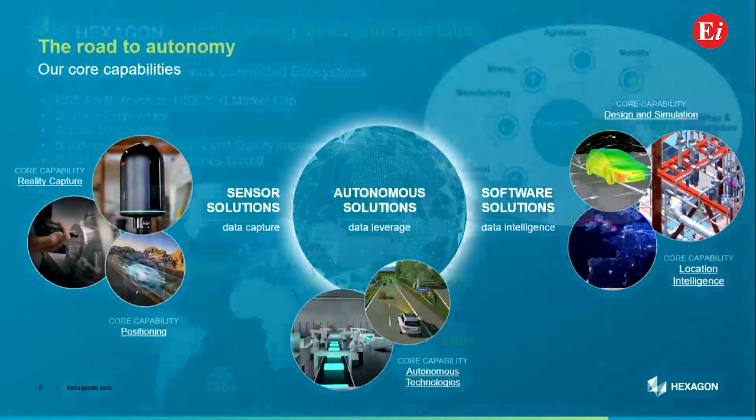And what is our key strength? The core area is autonomy. We are a company continuously working towards autonomy, through three core competence areas. One is sensor technology - this is our core area, the ability to capture data and the ability to integrate sensors into all possible equipment. And reality capture.

So we have our own cameras, our own 3D scanners, our own equipment, CT scanning systems to have reality capture, and we are also capable of positioning, that is geosystems and georeferencing. So this is one of our core competencies.

The second important competence is autonomous solutions. A quick example is we are partnered with Lexus and we manufacture about 40 autonomous cars every month. So autonomy is one of our core competencies.

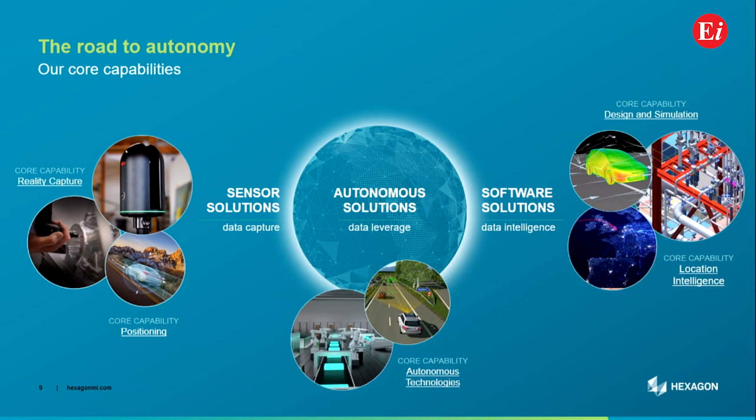And the third most important is digital, what we call software. I'm not happy to put this word software solution because now it's more about digitization. And of course, with the help of software, we do a lot of digitization. So these are the three important core competencies.

And out of this, we are going into smart digital reality. We use our core competencies to typically have digital accessibility, infinite connection, and autonomy. So out of all these, we eventually plan to reach smart digital reality.

A quick understanding of where we are positioned. About 95% of the cars produced, 90% of the aircraft produced, and 85% of the smartphones that are produced, there is Hexagon technology everywhere. So all of them are major users of Hexagon technology. And so for us, it is very easy and important to be part of your digital transformation.

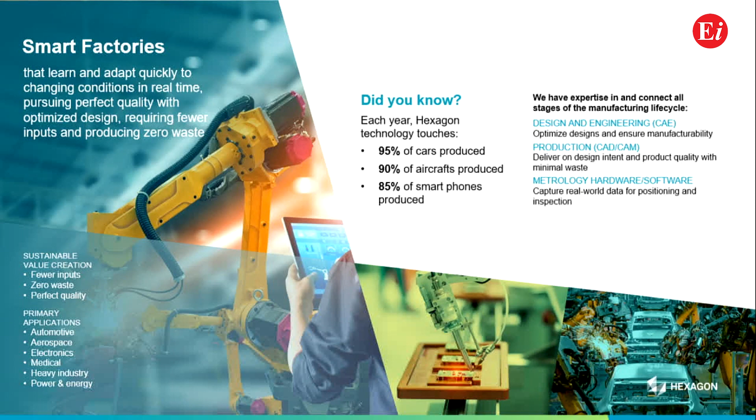So that is one of the core areas that we think of implementing to as many customers as we can touch. Moving ahead, connect and automate process and data islands to drive that particular value. So while we have a number of solutions, our goal is always connected to our capabilities. It's not that we go outside our capabilities to ensure something that is not possible. And one such is, we have all these capabilities.

Let's say, starting from design and engineering, you have factory operation capabilities, manufacturing, quality, and service. So these are all the important areas which are necessary for any electronic end-to-end manufacturing that you can perform.

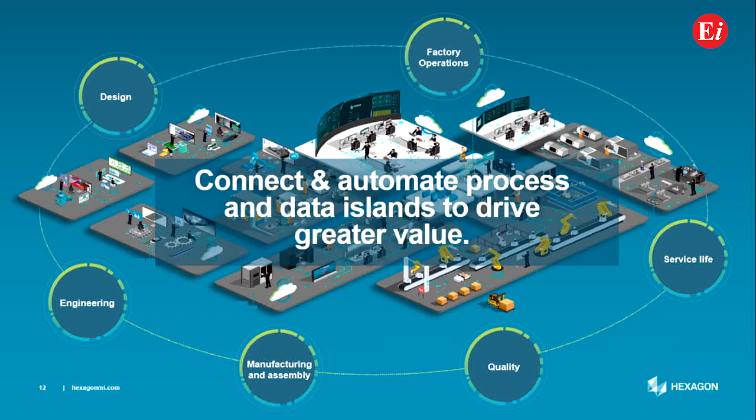And to further help on the smartness in the way you manufacture, what are the entities influencing this entire manufacturing aspect? This is basically digital transformation - your ability to connect your design to the production, your ability to connect production to inspection, your ability to do inspection and then maintain and then a feedback loop. So everything that is, as you design, as you manufacture, as you produce, and as you see the quality back to your CAD model.

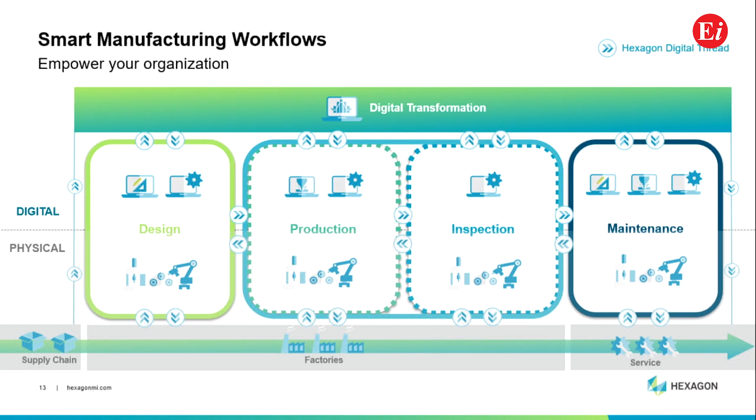So everything has to be connected in this digital environment, and that is what we are trying to provide to most of the people who will use Hexagon. So we have divided this into a digital space and a physical space. If you see here, there's a very fine line. Digital space performs all these activities in a digital or software environment, whereas the physical space uses, let's say, a scanner, a CMM machine, or a quality sensor. So all these digital and physical spaces have to be interconnected, and that is one of the most unique aspects of Hexagon as a smart manufacturing provider.

Now looking at electronics, typically why does an electronic equipment fail? I think this is the most critical aspect that any electronic manufacturer has to look into. So the four major reasons why they fail: the first is temperature. I think everyone agrees - any increase in temperature leads to failure.

Humidity and moisture - we have a lot of customers working on addressing humidity and moisture aspects because all the electronics are now compact. They are completely closed. There is no space for air to move, no space for airflow to happen. So natural convection becomes very low now, and you are fully reliant on evaporation and condensation aspects.

Then vibration and shock, drop testing. If you drop a product, how durable is it? Will it break or not? Our older mobile phones, however much we used to drop and play around with them, never used to break. Now with advancement in technology, we are seeing a lot of issues in this space, purely because there is no way for the force to escape a particular body now. Earlier, you might have seen the mobile phone break into multiple pieces - your battery, front panel, back panel would come out. That is one of the ways the energy is going out of your equipment. But now all your mobile phones are completely sealed, so there is no way energy can go out of your component, and so it breaks your screen, which is the easiest part from where your energy can come out.

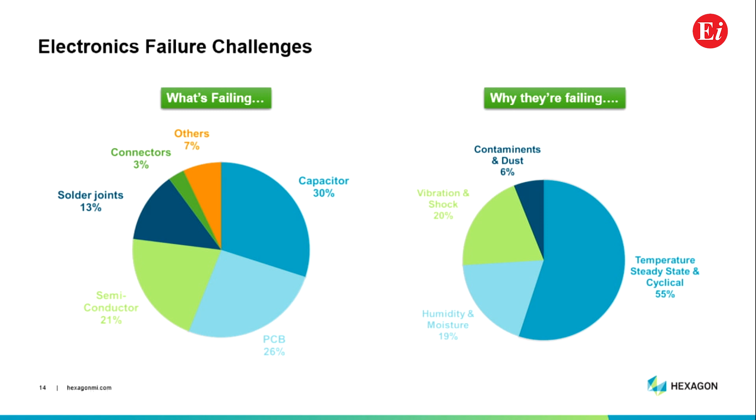Apart from that, what are the products that are typically failing because of these aspects? Let's take a look at that, and then what is important when a new product introduction is happening into the market. Most of us are aware that only 3% of consumer electronic startups make it to the market successfully, and why that is happening is because of product launch issues, product technical issues, manufacturability issues, availability of technology issues, and so on. There's a lot of factors integrated into this inability to launch a particular product, and that is where digital transformation comes into picture.

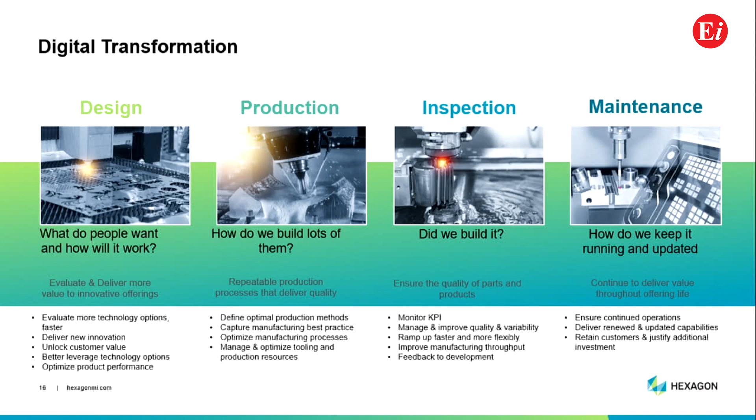So if you want to really launch a product, can you perform digitally a design? Can you produce your product digitally first? Can you see the feasibility of your product in a digital manner? And can you see the maintenance aspect of your product in a digital manner before even going into the launch, or the product development, or the design and prototyping phase?

To help with that, let us see what I mean by a digital thread. Now you are seeing an example of a simple joystick. You can imagine this joystick to be any other electronic equipment. When I'm talking about design and engineering, I'm talking about materials modeling. I think all of us want lightweight materials, we don't want a heavy metal phone or anything of that sort.

So you have to start by designing the right material, then manage your material. Some of the OEMs may manufacture and make their own material, and these will be proprietary materials. Now how do you manage your material? That also has to be maintained digitally. Designing your component, thermal management, and structural integrity. Some of them include motion.

Your electronic components may have a lot of moving equipment. How do you understand the dynamics of your product? Frequency in terms of structural frequency, acoustic frequency, and so on. Fatigue, impact, like your drop testing. Plastic flow, so your molding activities, right? How do you ensure accuracy in molding?

Internal scanning - if I want to understand whether all my parts are integrated well into the equipment, the one thing anybody does is a CT scan. So you put your equipment through a CT scan, but that is a high investment technology. So you need a digital technology to basically understand this structure before even investing in a CT scan machine. So digitally, can you do this particular internal scanning activity?

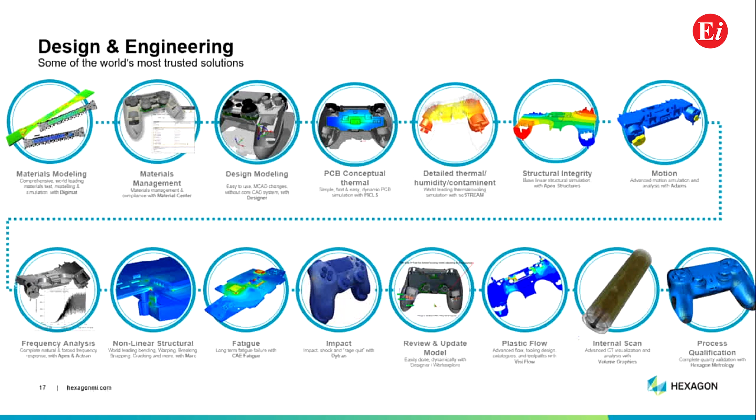And then of course, the process qualification - are you going through the right process to design the right material? So this is from the design and engineering perspective. Then comes your manufacturing and production digital thread. Whatever you see here is a digital thread. None of them are using any machines, they are all using a digital ecosystem.

So digitally, can we do additive manufacturing? I think mobile, any electronic, uses additive. Digitally, can we do metal studies like sheet metal stamping, forging, forming, welding, whatever it is? And robotics - heavily dependent - but can we digitally do an assembly line and the entire process? Tooling - what sort of tooling is needed? What sort of CAM activities are required? Everything, including your asset management and production execution, everything in the digital ecospace.

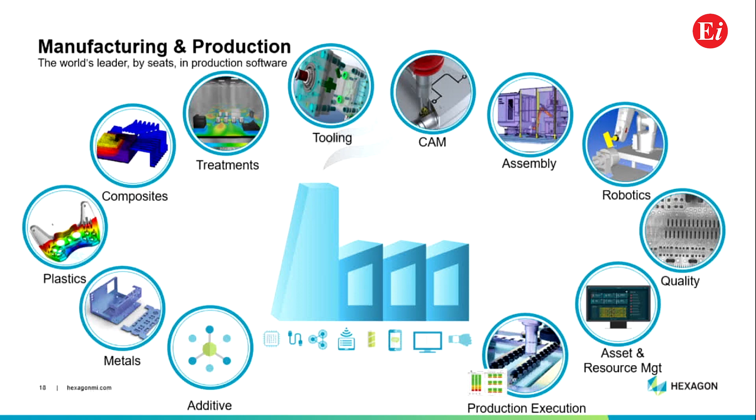Now, this being your manufacturability and production capability studies, then comes your quality and validation studies. Can we do this phase also digitally, like inspection, non-destructive testing, laser probing, dimensional accuracy validation, positional alignment, thickness, coplanarity, flatness of your product - let's say the screen, or your PCB boards, or your electronic component - homogeneity, and real-time asset visibility. What is your asset in the manufacturing phase? What is the current stage of production and so on?

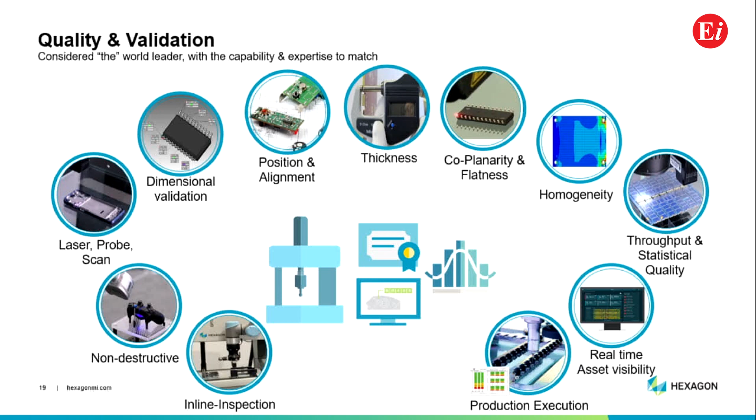So everything becomes a digital ecosystem when you are able to connect the physical world and your digital world - that is the solution we are talking about. And for that, I'm going to take the same example of a controller, because I cannot really show any of my customer products. So I'm taking a simple example of a controller and showing you how we are performing all these activities which I spoke to you about in the form of a digital thread.

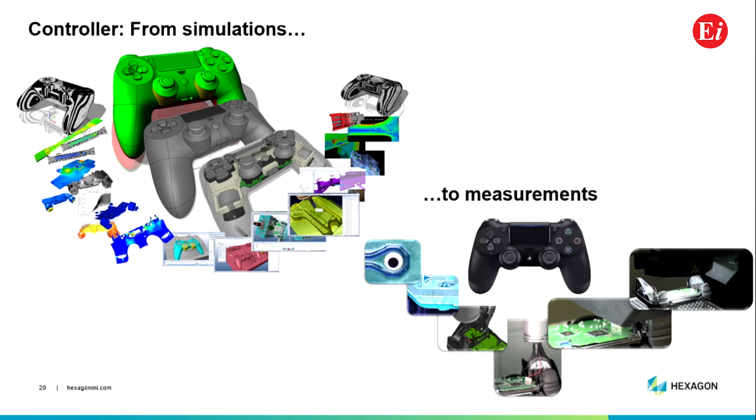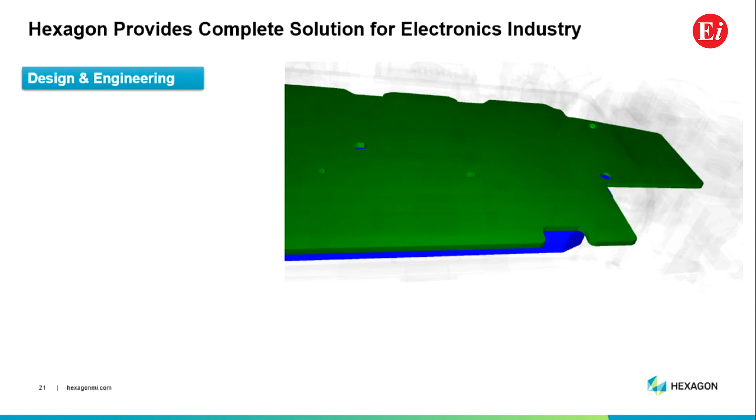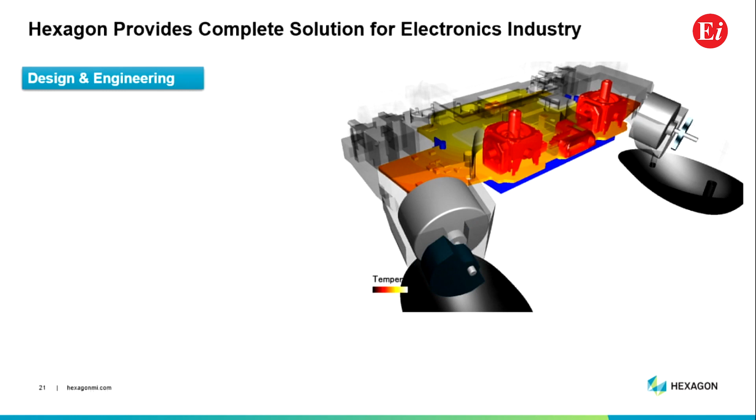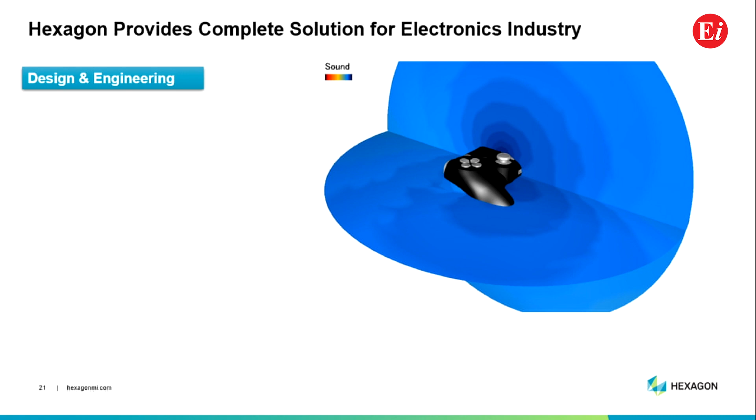So the important thing is, let me start with design and engineering. What you see here is the digital 3D created CAD of a controller. We are performing structural analysis, thermal analysis - you can see the temperature contours, the motion dynamics. These are all your 6DOF motion equipment digitally recreated. And then the materials, the acoustics - what is the sound produced by this particular equipment, and so on. So this is from the design space, just taking a few sample cases there.

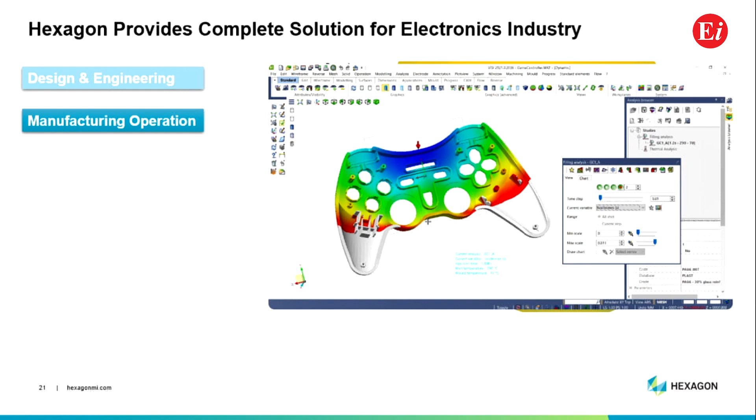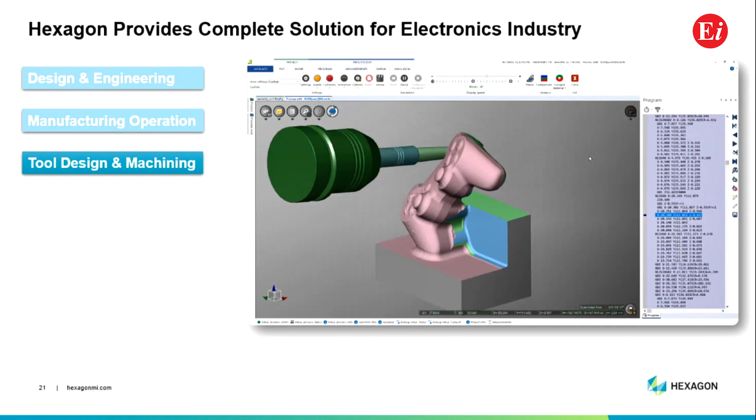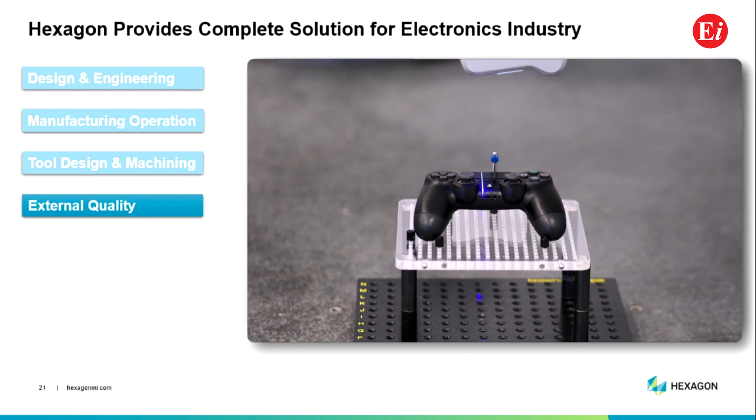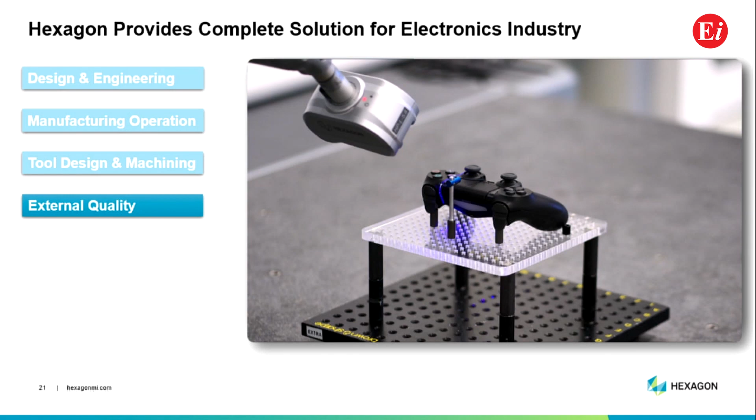Moving ahead on external quality, these are CMM machines of Hexagon. How can you scan this part and digitally assess the quality? We do an external scan and then use the output of this digital scan to understand the external quality of the surface and internal structure. If you want to understand the IPX rating of your product, this type of scan helps you understand where spaces exist through which water or dust can enter, and lets you re-simulate and navigate that flow of water to some other place rather than it going directly to the PCB and affecting it.

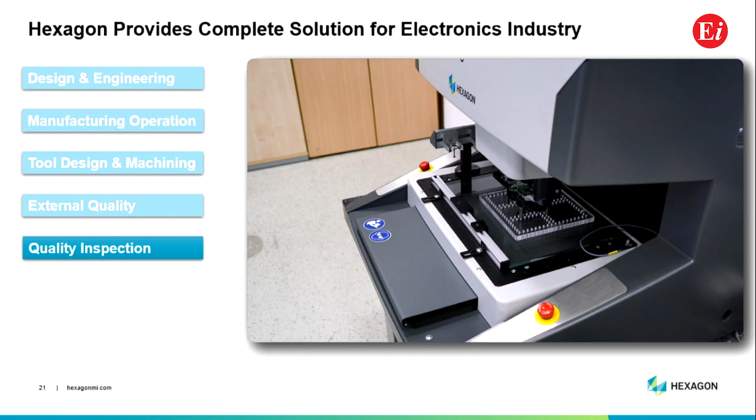Then comes your quality inspection. These are called blue light scanners, white light scanners, and laser scanners. What we are seeing here is a PCB located inside the same controller. With this, we try to do quality inspection and transfer this data digitally to understand coplanarity issues, structural issues, and so on.

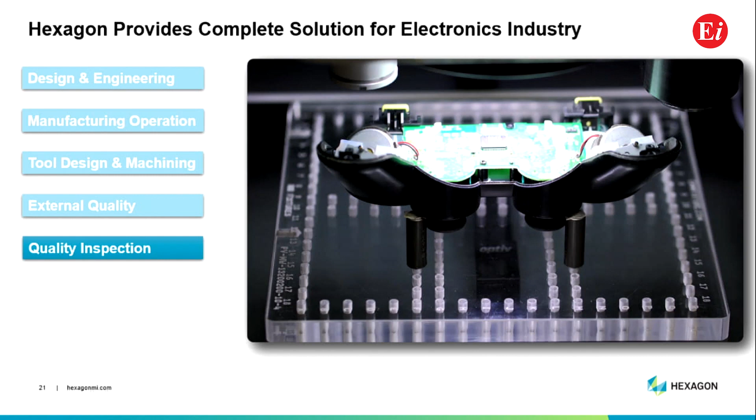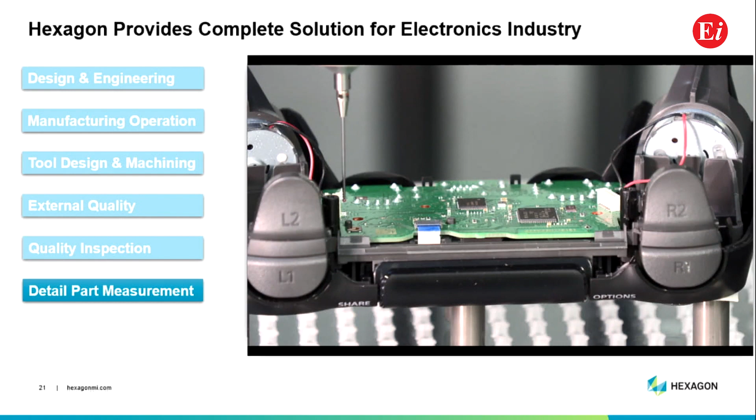And detailed part measurement. This is a digital environment recreated by sensor probing, so you try to understand whether the measurements are as per your CAD. This is the complete cycle you want to do - whatever your designer made and what you manufactured, is it the same? Or is it completely different? Or does it not align on some aspects? So those types of part measurement activities continue at the solder level or drill hole level.

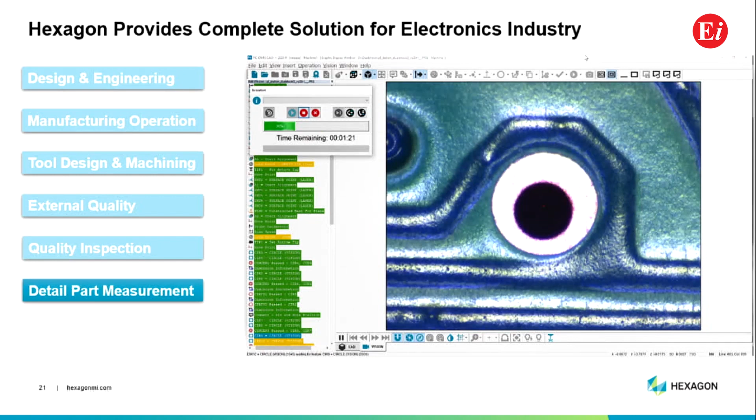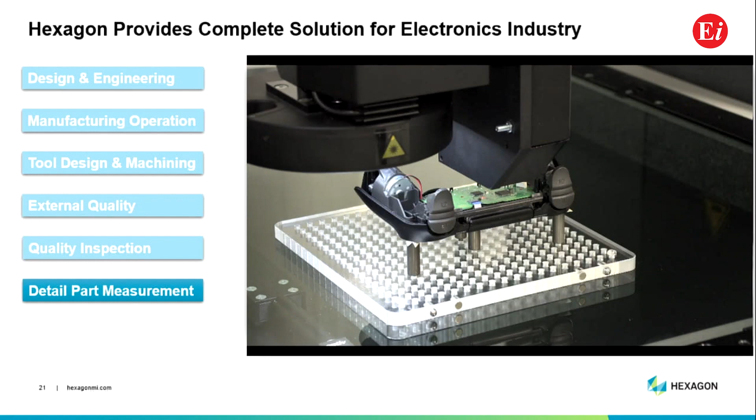This is more towards the nano and detailed understanding of solder joints, hole joints, or thermal drill holes and so on. So how can you really scan and understand those aspects?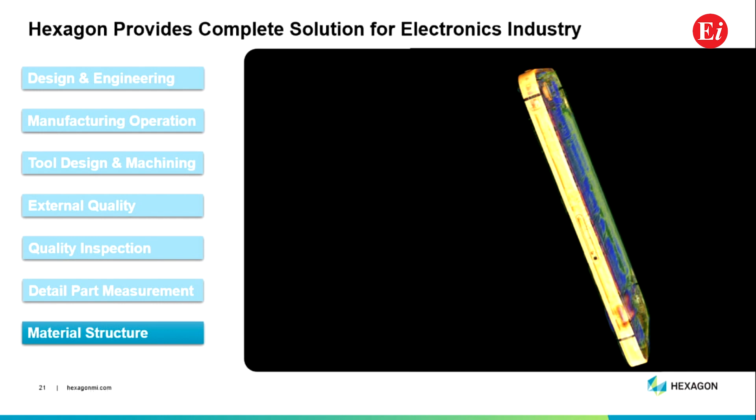And then finally, the material structure. This is a mobile phone which has undergone a CT scan. When you do a CT scan, it's just an image. How do you create a 3D model from that CT scan to understand the internal connectivity and structure of your mobile phone? Using certain solutions, you convert your CT scan into a 3D image and are then able to break it down to understand if there is a part missing. You have a mobile phone, but at the end of the line, you identify that a part is missing - there's no way you're going to rip it apart, so it's easy to do a scan to understand what is missing.

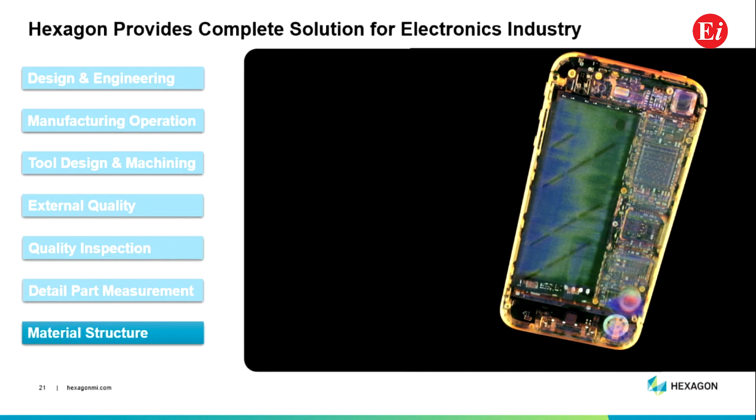A screw is missing - simple things. We are not talking about solving major issues; first let us try to solve simple things like identifying what is missing.

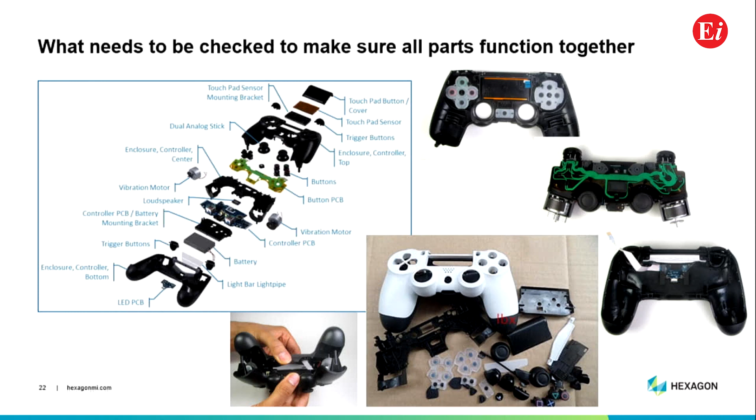So this is the detailing - something as simple as a controller can be as complex as this. And if you are unable to fit them through, then whatever the product might be becomes a challenge.

What we need to understand is there is a huge gap between our theoretical understanding and what practically happens. Theoretically, a structure may not break, but practically, for example, my phone has been falling continuously for many days and never broke. But one fine day it just fell from a few feet and it broke. That cannot really be theoretically validated - these are all part of understanding material and experimental analysis.

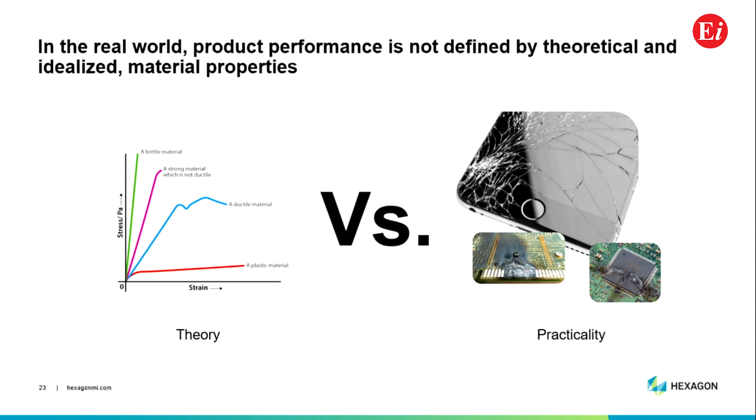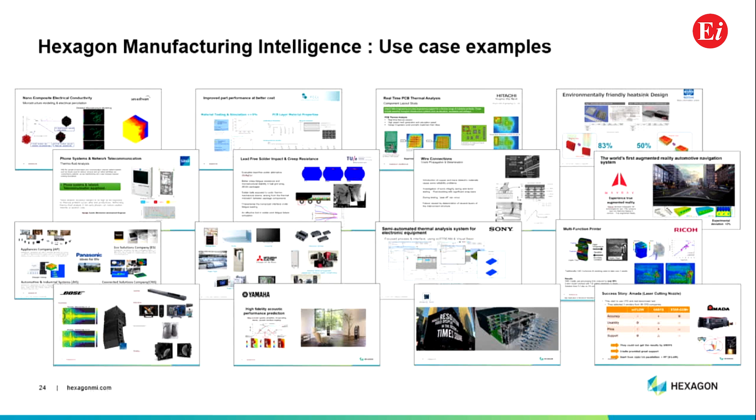To help with this, we have also worked with a lot of customers like Yamaha, Bose, or Panasonic to understand and develop these types of end-to-end technology. These are also available for many of you to look into. And some of our customers - I'll just skip through this due to time.

I'll quickly finish this - we are now venturing into solutions for 5G, automotive, and aerospace. And we have this concept of OneMi, which is nothing but the ability to connect design, production, inspection, and quality under one single platform. That is what we call OneMi.

So with that, one important question is, how do you know that your technology and process will work? I think every new product manufacturer or tech person introducing technology needs to understand this question beforehand. To give you an answer to this is what Hexagon is basically going to help with and thrive on. With that, I end my talk.